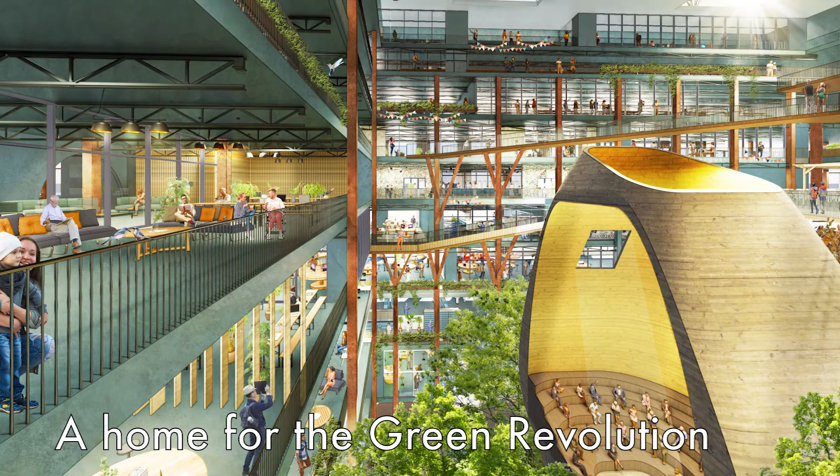In recognizing the arrangement of the Tech City, the Square Mile, and the Cultural Mile, we spot an opportunity for the Green Mile to form the missing piece of the puzzle and to connect with the residential neighbourhoods of Tower Hamlets and Shoreditch. The building will be the headquarters of the Institute of Green Technology, researching and developing cutting-edge advancements such as new sustainable methods of hydrogen production, net zero transport strategies, and green finance.

Integral to this vision is the inclusion of spaces for education and reskilling, harnessing the connection between work and education as a more resilient long-term typology. 4 months ago, the UK government announced their 10-point manifesto for a green industrial revolution, planning to invest £12 billion of public funds into green technological advancement. This major move will inevitably further catalyse investment in the private sector, and thus the City of London has a real opportunity to support trailblazing businesses in the progression towards a greener future.

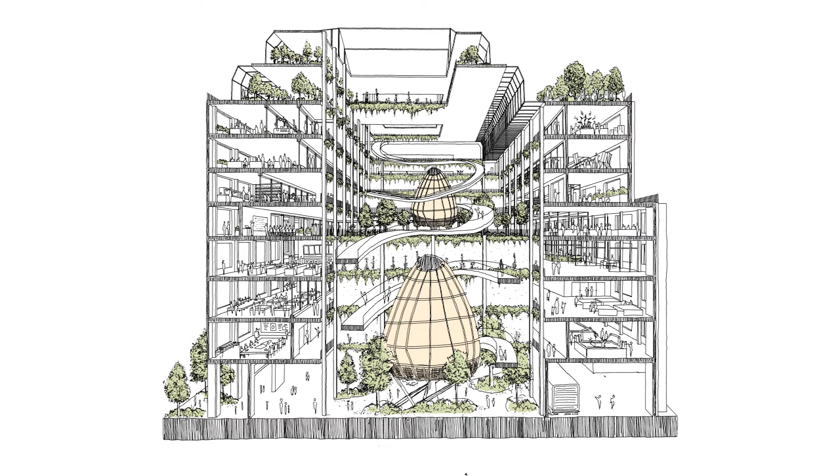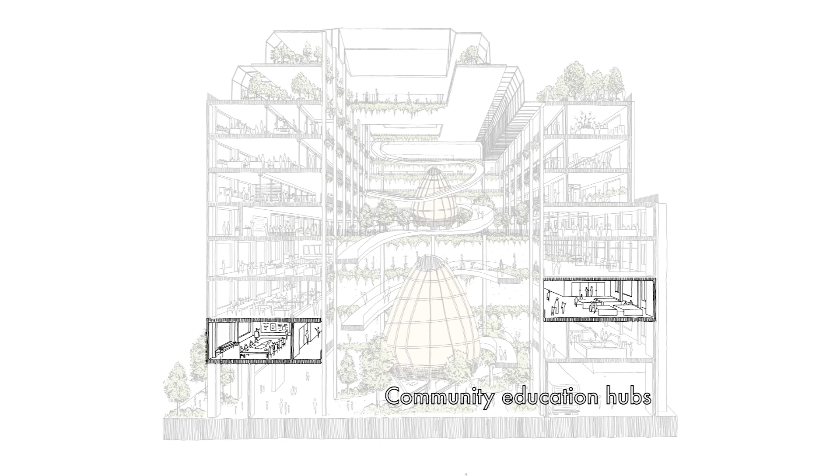In the Institute of Green Technology, green engineering companies and apprenticeship schemes exist alongside groundbreaking research laboratories, interconnected via a core public programme that seeks to educate children and adults alike in ecology and nature. The network of interconnected programmes aims to benefit a wider demographic of Londoners than the corporate office currently does, whilst encouraging a buzz and a gossip between all those who use the building.

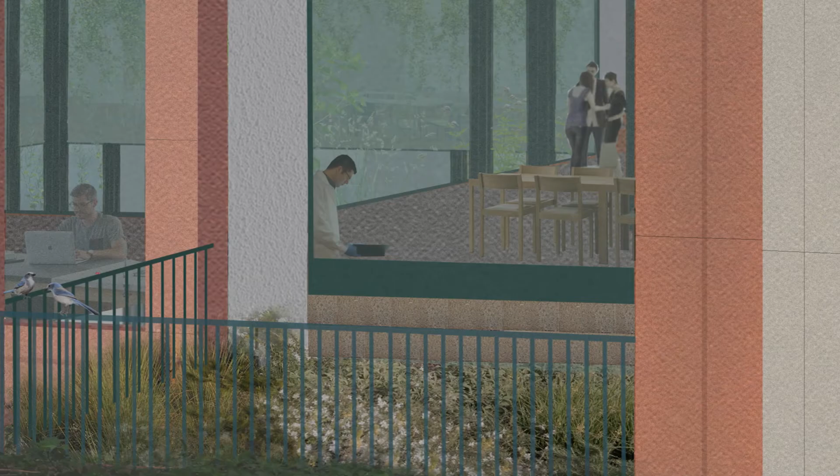Capturing the crossover between private corporate work and more open educational and research spaces, our design focuses on the irreducible areas of the floor plan, such as labs, testing facilities, classrooms, green workshops, and social collaborative workstations, providing an exciting environment that is just so much better than the kitchen table.

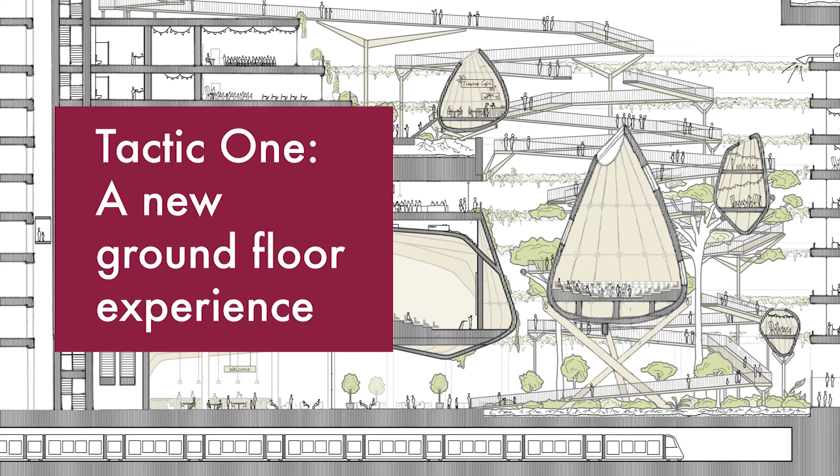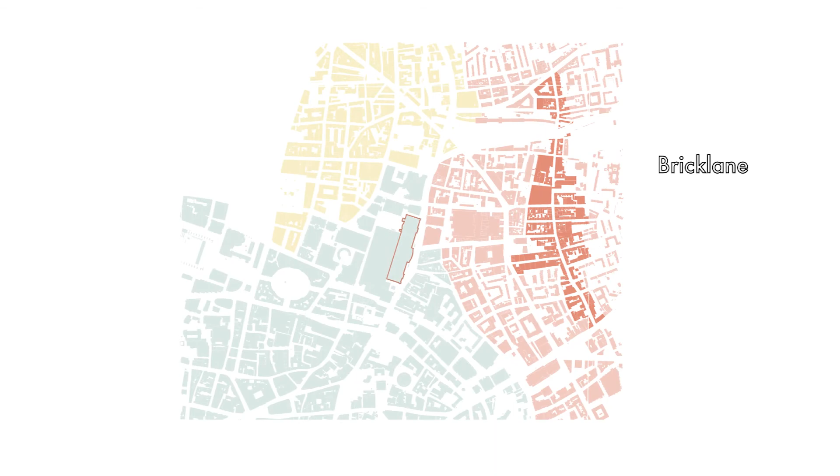Built by SOM as part of the Broadgate development in the 80s, 135 to 175 Bishopsgate sits on the northern fringe of the city, on the boundary of 3 distinct boroughs, and sits directly on top of platforms 11 to 18 of Liverpool Street. Despite its proximity to the lively permeable fine grain of Brick Lane to the east and Shoreditch to the north, the fortress of Bishopsgate does everything it can to turn this footfall away and hides its one route through the building at street level.

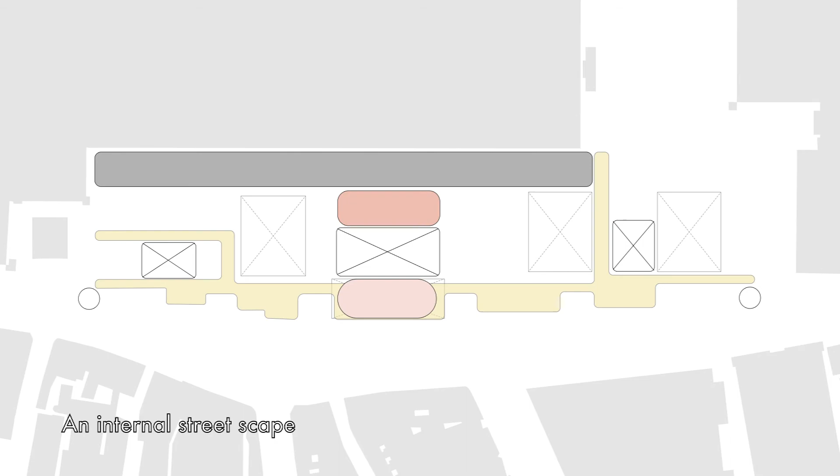By stretching 260 metres in length, this landscraper offers huge potential to impact the public realm and meet our ambition to open the city gates and offer more than just retail for people who want to venture inside. Our first architectural intervention opens the building up to become an internal public streetscape, establishing itself as a vibrant gateway between the East End and the city.

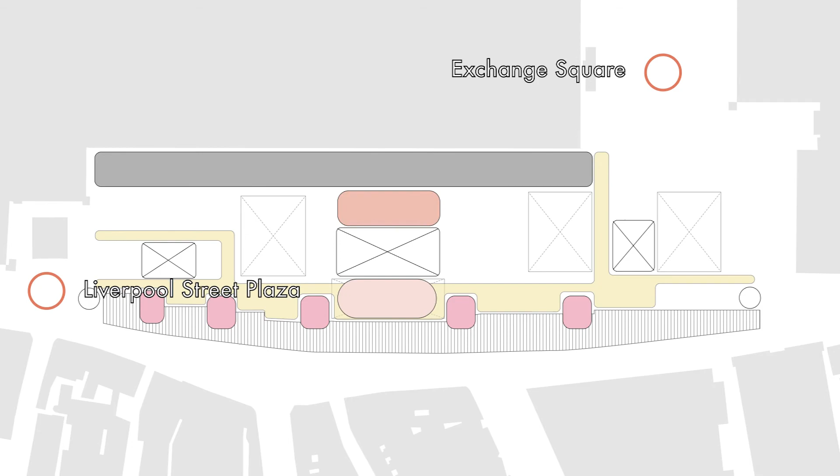New entrances align with key crossing points from the streets opposite, and a more welcoming sloped threshold of vegetation mediates a step change into the building, improving its connection to Exchange Square to the north and to the plaza outside Liverpool Street Station. This intervention activates a new public programme connecting a food market, welcome centre, community workshop and materials library space to the institute above. A new entrance from Liverpool Street on the southern edge becomes a visual experience from outside, where you see the entrails of the courtyards within.

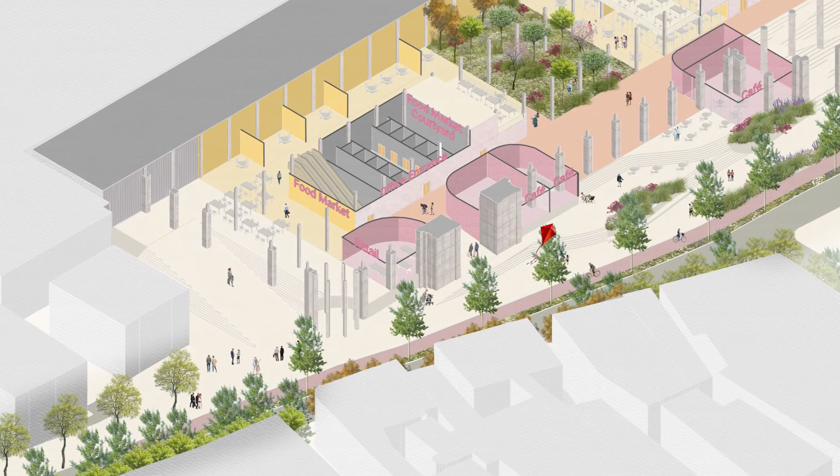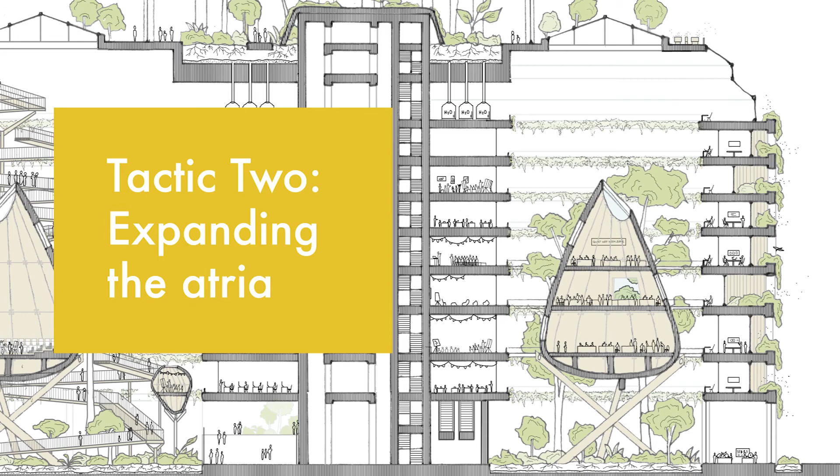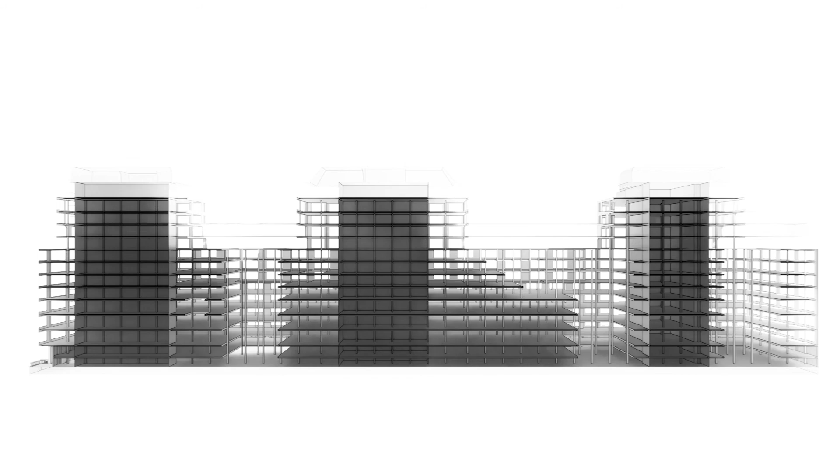These sit beneath new widened atria which currently provide insufficient light into the deep floor plates. The addition of natural ventilation replaces the current outdated mechanical systems and provides a new type of plant for the building. The new openings on the ground floor invite the public into the green expanse of the new central atrium, which acts as an interface between the institute and the public realm.

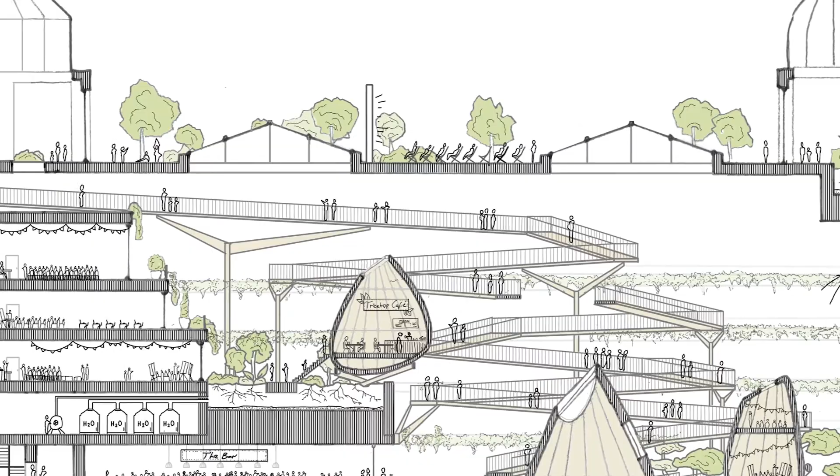Flanked by an interior facade of planting and nature, a treetop walk winds upwards between new wooden pods nestled in the foliage, connecting the ground floor to the roof. Recognizing there are still significant environmental implications of renovating a building of this size, we aim to phase all our architectural tactics into short, medium, and long-term interventions.

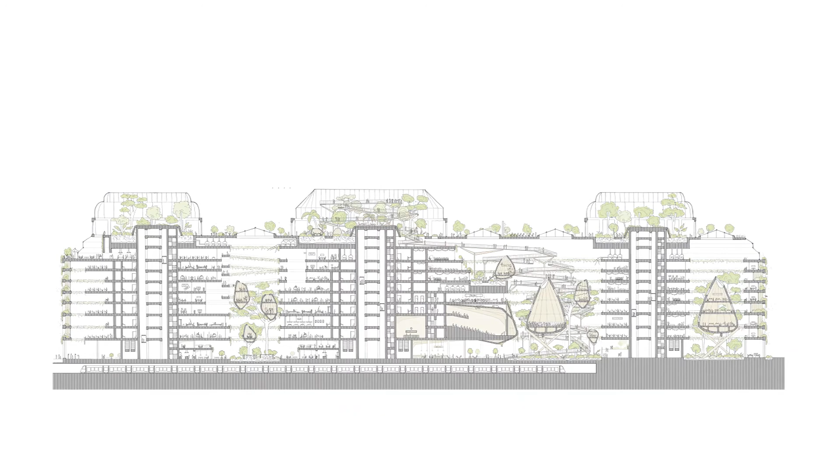Staggering the expansion of the existing atria aims to stabilize the effect on the land value of the building and enables live post-occupancy evaluation to influence these incremental design interventions. We hope this long-term approach ultimately sets a precedent for ambitious knock-on projects in the new Green Mile.

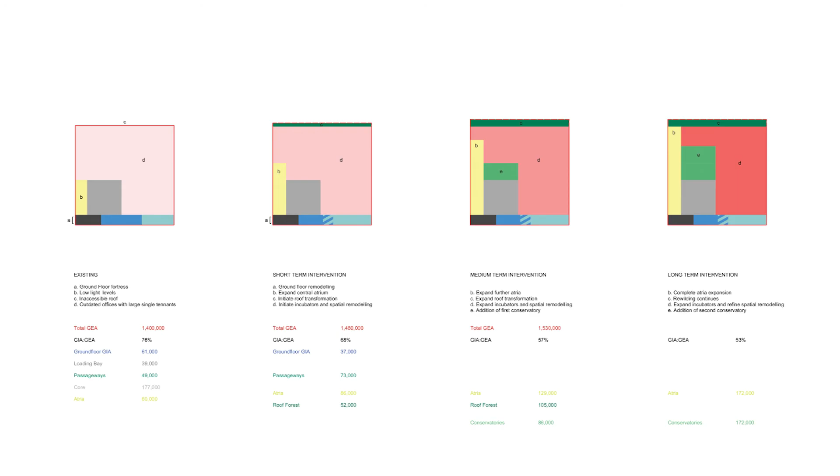Free from the constraints a residential population would impose, the city has greater freedoms to do as it pleases with its existing building stock. As a contentious behemoth of a postmodern office building, the threat to demolish it is real. Whilst recognising the building needs serious improvements to make it fit for purpose in the future, we want to use the building to promote the circular economy and readaptation of existing structures in the City of London.

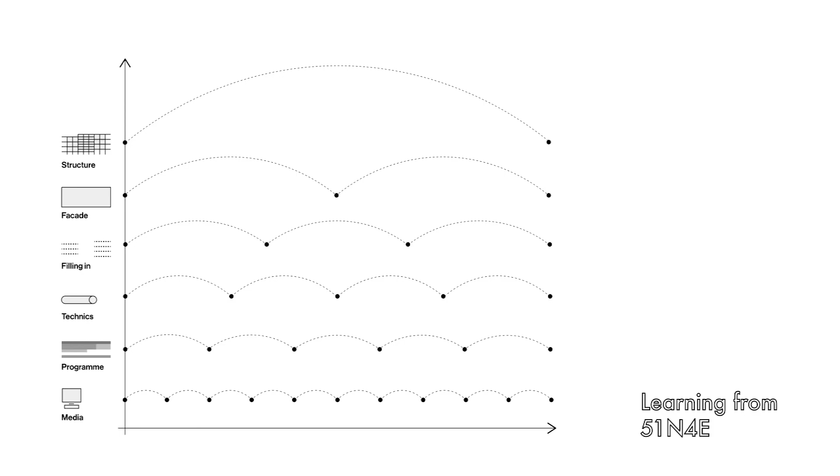Adding new green infrastructure such as biophilia, natural ventilation and circular economy principles challenges the conventional timeline of a building and the linear cycles of its components. With the option of work from home, dull offices are now inexcusable. Very little has changed internally since the 1980s, when the EBRD moved in, and private director offices flank the perimeter of the building and block access to natural light within.

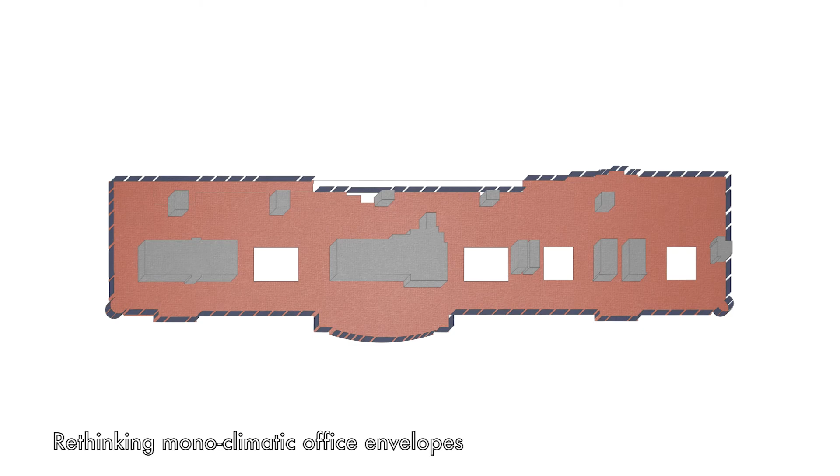To reimagine the space through a softer architectural approach and challenge the monoclimatic nature of conventional office spaces, we aim to reuse the existing outdated glazing envelope to create new internal configurations of both controlled and variable climates, with new external spaces introducing pockets of dual aspect greenery.

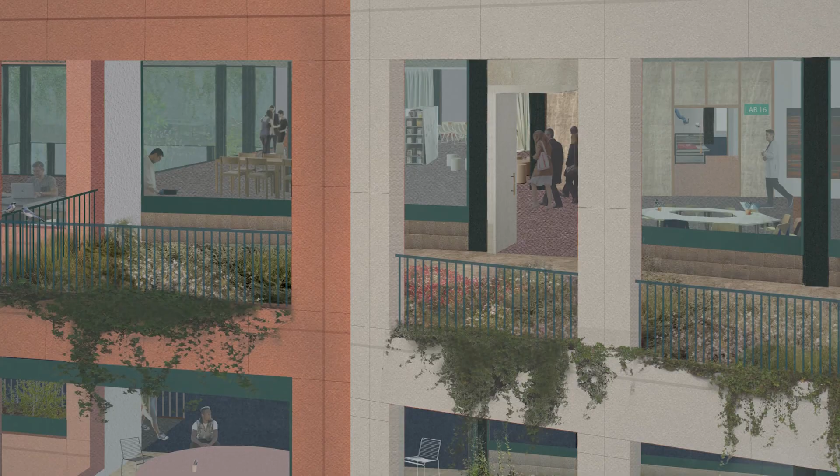Our final tactic transforms the currently inaccessible rooftop, replacing air conditioning units with a rewilded forest canopy. The rooftop is the crown of the project, providing safe spaces for wildlife to thrive in the city, alongside places to look out over the developing Green Mile.

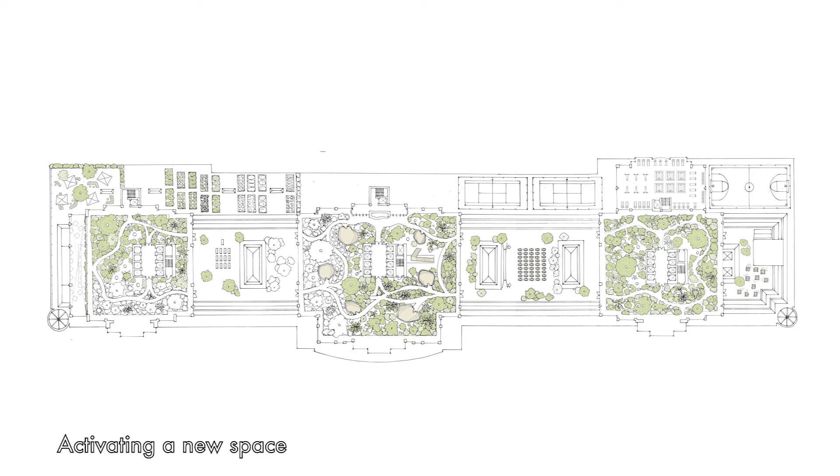The roof brings together a focus on both physical and mental health, with public sports facilities surrounded by allotments, grassland, beehives, wild vegetation and greenhouse conservatories, housing a rich diversity of biophilia. A rooftop bar, restaurant and outdoor cinema supports the building's public programme below.

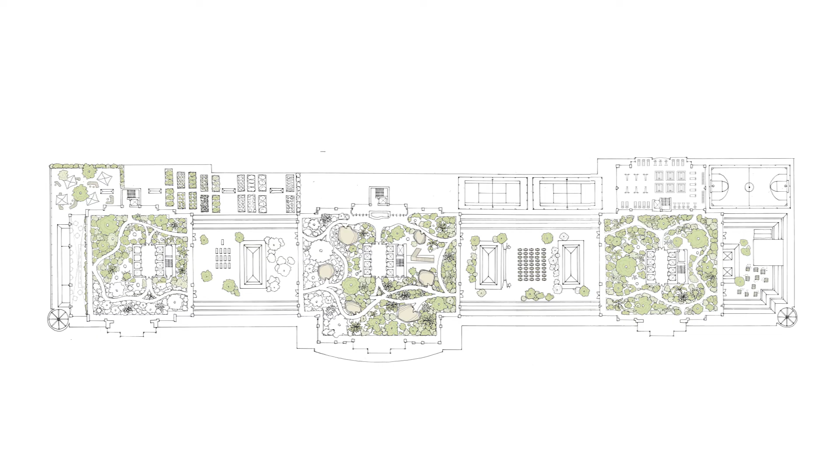Framing these interventions through gradual rewilding recognises the structural and environmental implications of building this vision on an existing building. Focusing on the long term, incremental change is needed to transform the rooftop. The heaviest areas of soil depth sit above the existing bomb-proof cores, and the new water system lays the groundwork to trigger the conditions necessary for rewilding to flourish.

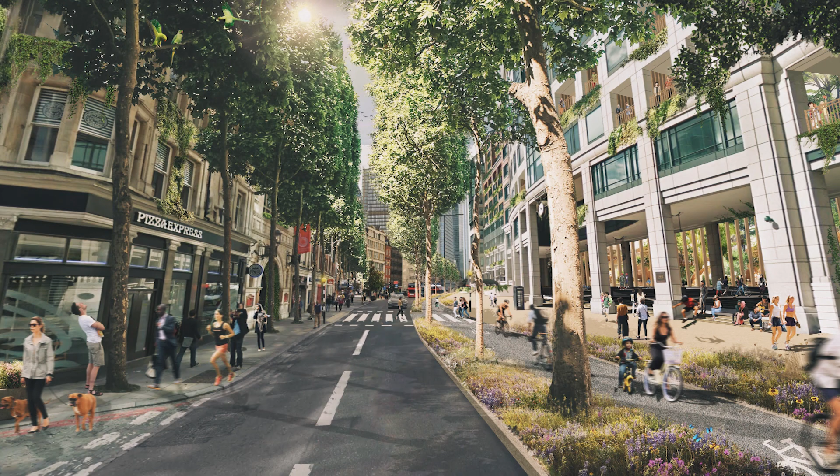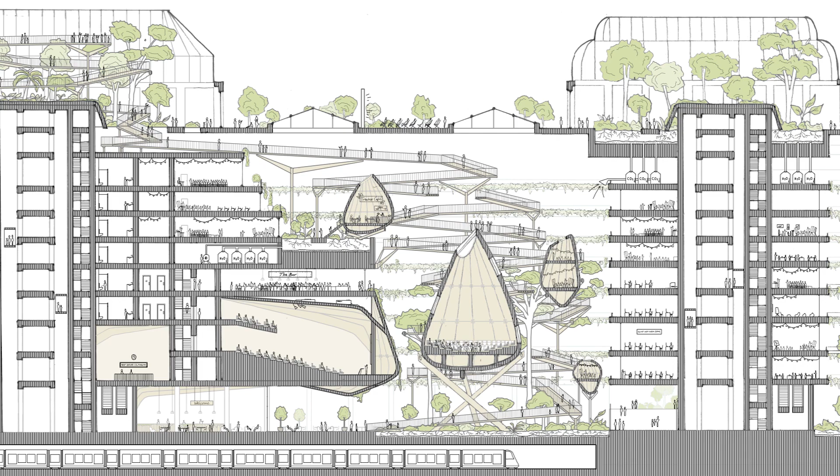A core tenet of our manifesto is that all should benefit from this green revolution. Given its wealth, the city must work harder to be more propositional in its social offering, opening its eyes to the inequalities that exist at its fringes. Our new public program pulls new users into the building, and a treetop walk winds upwards between the collaboration pods entangled in a rewilded atrium.

Our vision for 135-175 Bishopsgate hacks the city's forces of agglomeration to establish a new institute of green research and as the first beacon of a green revolution. This is a manifesto for a different way of working and a greener, more connected way of being.